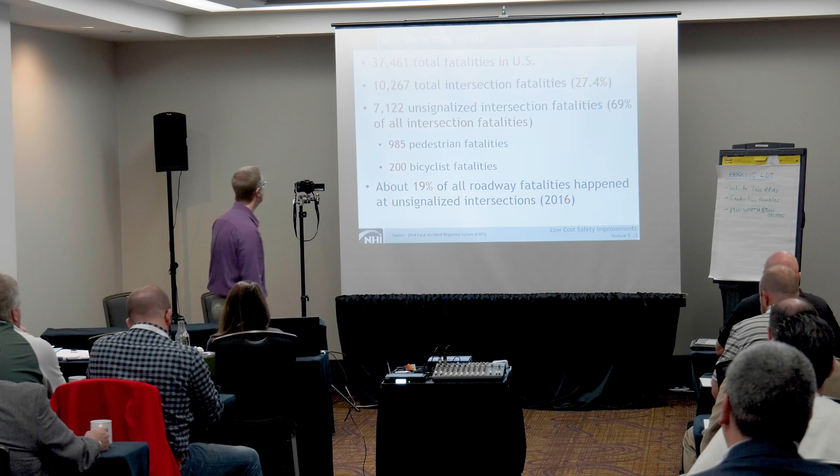So what's of importance here? 20% of roadway fatalities are at unsignalized intersections, nationally, 2016. We've got a good chunk of ped crashes, those keep going up, and bike crashes, and about 27% are at all intersections. So what does that mean? Not a lot of fatalities tend to happen.

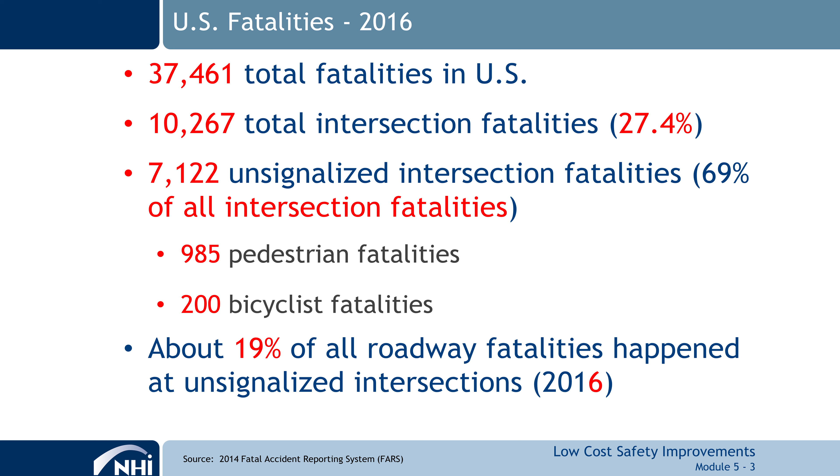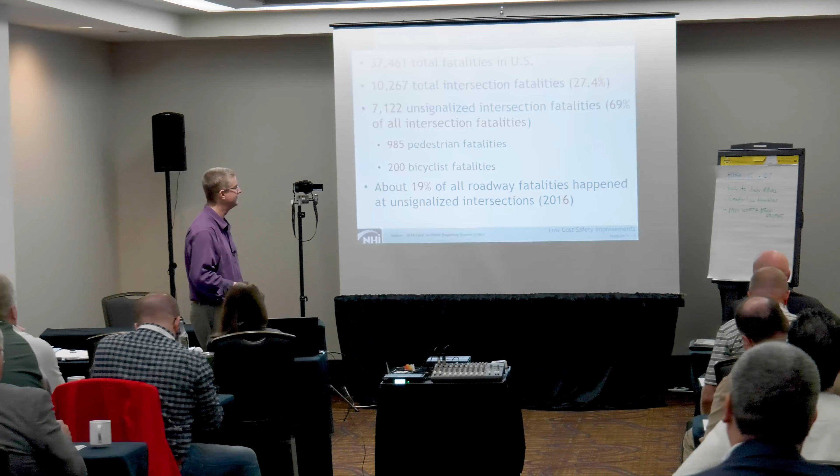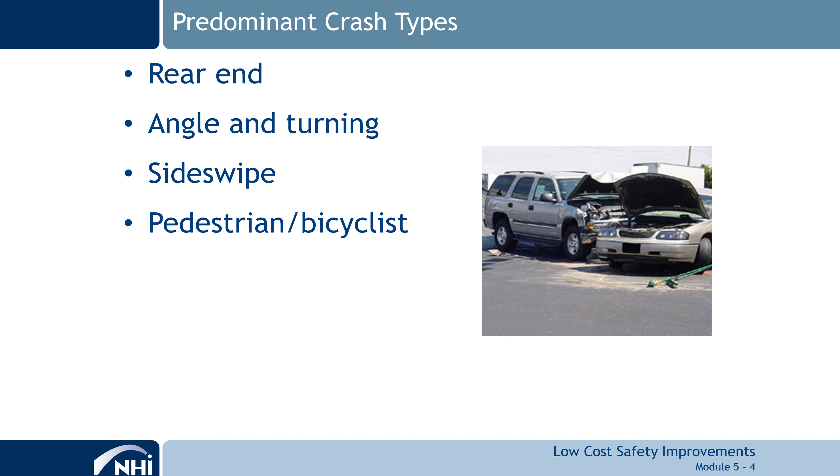So we have rear end, angle and turning, side swipe, and ped crashes. We mentioned in signalized intersections that your PDOs and your rear end collisions may go up, but your angle ones may go down. You need to recognize that sometimes we're making decisions based on the type of crash and the severity versus all crashes, because your crash rate will go up when you do a signalized intersection.

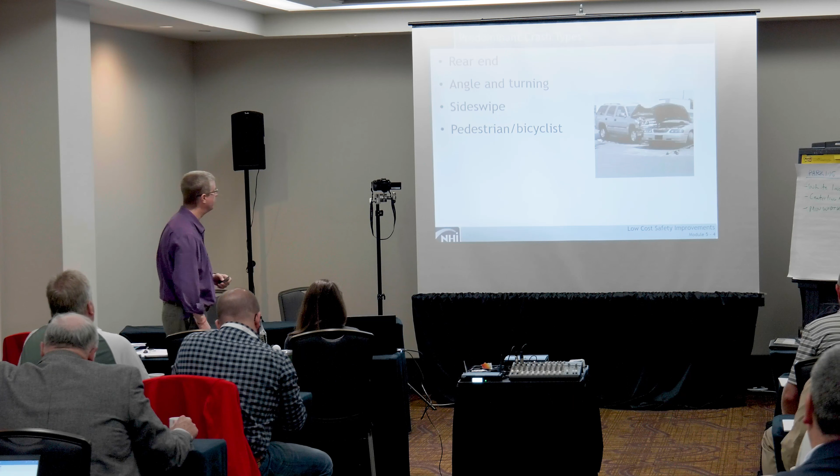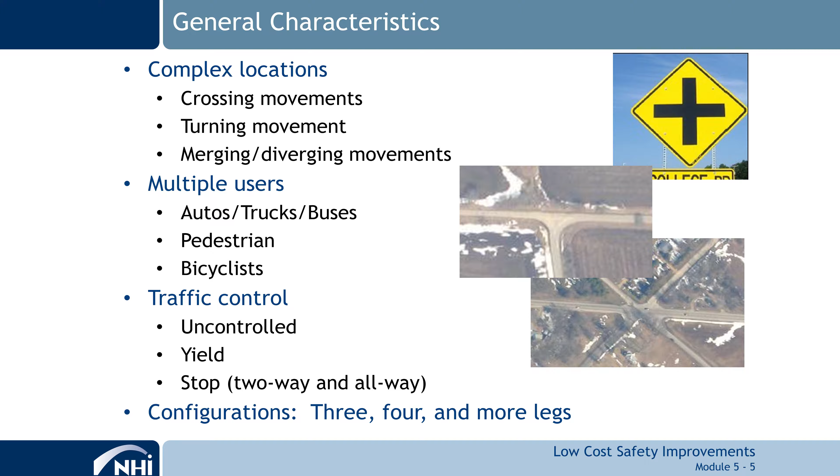Where's that lower one at? I have no idea. What would you do here for a safety improvement? A roundabout? Yeah, you already have enough asphalt. You certainly have a ton of asphalt. Yeah, you probably already have the right-of-way.

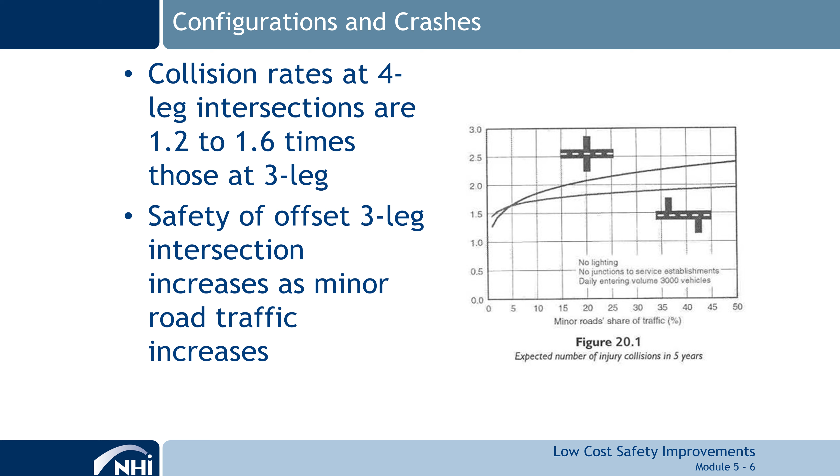There have been studies on converting from 4 to 3-legged intersections. We do know, again, more conflicts at 4-legged intersections, 1.2 to 1.6 times those at 3-legged. And the research has shown that safety at offset 3-legged intersections increases as minor road traffic increases. What this graph shows is basically crash rate with regard to minor road traffic share, this one for the 4-leg and this one for the offset 3-leg.

And it just shows that gap getting bigger as the percent gets higher. There is something in the Highway Safety Manual related to this kind of conversion, and that's this slide. There's a little bit of documentation out there online about converting 4-leg to 3-leg.

As the designer, I want to make sure that those things are far enough apart that they're not interacting, and that I don't have a lot of through volume on my minor road. There's percent of minor road traffic, and then there's through traffic on your minor road. So all this is saying we're taking the number of conflicts down, and now we're separating them. You can also bring them together.

What does this impact? What operationally does this impact when you do this kind of conversion? What does it increase, operationally? Delay. Delays. I mean, what I'm talking about is operations, so there's operations parts to this too—there's delays and things like that.

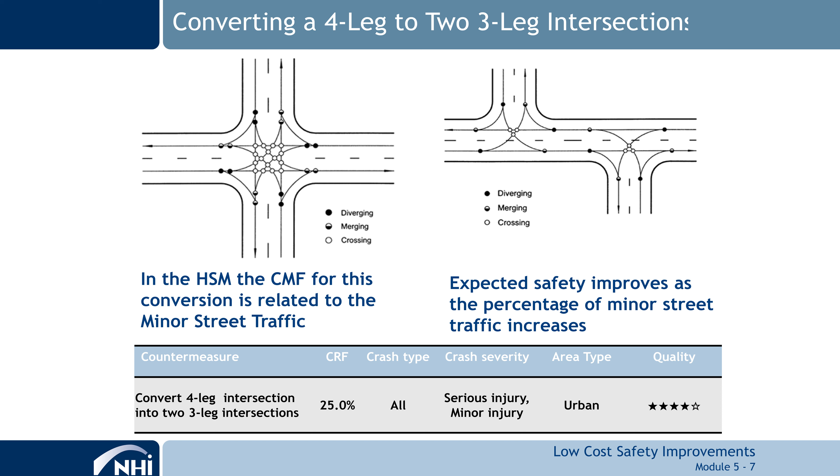And there's a difference between this design and if you were to flip those. It's about where you're turning left and where—turning left off the main road this way, you're turning right off the main road this way, you're turning left on the main. See what I'm saying? It's about where you're turning left on and off. And so all this matters.

So we're simplifying this in a lot of different ways, but there's a 25% reduction in all injuries in an urban area for specific situations. Sometimes this matters if designed properly and correctly.

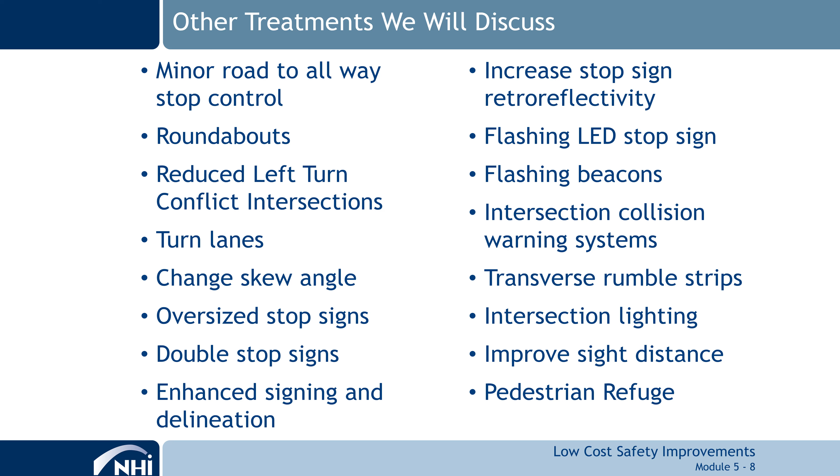Okay, lots of treatments we can discuss. Does anybody have anyone in particular they want to discuss? Because we've got time, I'll just kind of clip through them like we've been doing. The very last one?

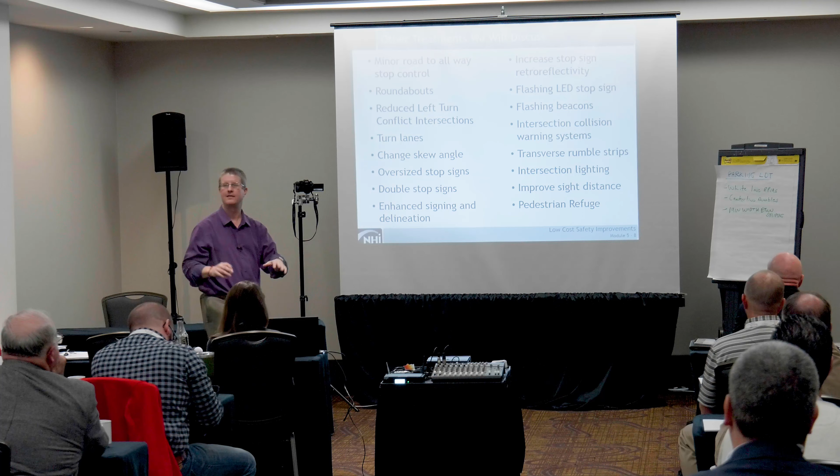The last slide—did you say that if you're going to convert it from a 4-way to 2 3-ways, you want to do it this way, you don't want to do it the opposite way? It just depends on what you want to do. You don't want the left turns over that. If you do the opposite way, yeah, you'll have that problem with the left turns.

Right, they got to be far enough away. Yeah, if 400 feet, at least, yeah, depending on the design and which way they go. Yeah, it's all related. Yeah, I understand what you're saying. I would think if you're moving it that far, that it'd be a pretty hefty, expensive project to move that far. Well, yeah, and we may or may not be talking about low cost here either.

When they did this study, it was my understanding that they didn't split it out between the two different designs, but just from an engineer's or operations design person's point of view, I know there's a difference between this and this, right? Yeah.

There's that four-way again, it's supposed to be all-way. This is in the highway safety manual, minor road to all-way, 75% reduction in angle crashes, 48% in all crashes. But again, specific situations, right? The MUTCD has warrants and things like that for this kind of thing.

It's not just everywhere. So it's reducing this kind of crash in moderate volumes and balanced volumes, and being selective, because delay and things like that change too. There's operational trade-offs for this kind of thing.

And then we have way too many unwarranted stop signs out there in this country, in my personal opinion, including somewhere where I was over Thanksgiving back at home in a very well-established neighborhood.

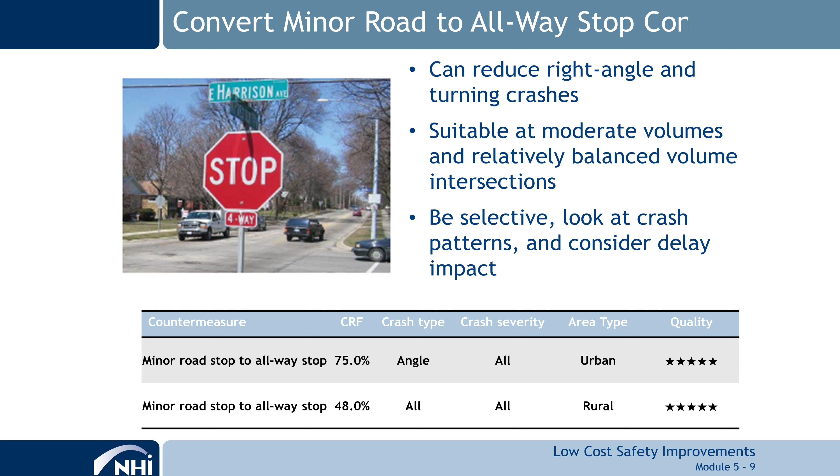So I think, yeah, 2009, the shall was you shall use all-way, that you shall not use two-way, three-way, four-way — it's actually a shall not, which is unusual in the MUTCD.

Those don't have to be replaced immediately, just after a useful life. Is that correct? It's all about that first chapter of the MUTCD and how you follow it. And in the first chapter, it talks about what you're talking about. Yeah, it's not like you got to go out and change everything.

But if you take it out and you don't have an all-way and you've got something else that still moves, then you have to add another sign that says traffic from the right doesn't stop or something like that. It's a yellow sign at this point. So, yeah, you'll have to read the MUTCD, or we could go do some training on it.

Big percentages in the highway safety manual for roundabouts, from stop control to a modern roundabout. And then this one's on a high speed situation, 87% reduction. Again, huge percentages, rural, urban, yeah.

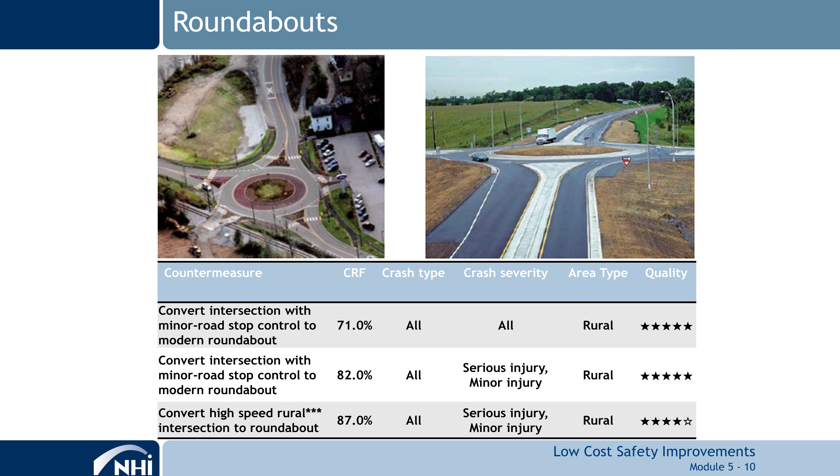Is there a volume limit to where you consider a signal instead of a roundabout, like a limit on traffic?

So I haven't done any kind of training in roundabouts for some time. You can get pretty high volumes through a roundabout, particularly if you're going multi-lane. I've got three right near my house that, not multi-lane, but lots and lots of traffic flowing through those.

The only place I've ever seen a signalized roundabout, and I know what you're saying, but at some point out in Germany, the volumes got so high on their roundabouts that they started signalizing them.

And it's really quite a dance when you try to signalize something that goes in a circle. It's really quite incredible.

The J-turn, I call it the J-turn. I know it's also called the RCUT now — the R-turn, R-cut, U-cut, restricted crossing U-turn.

Mr. Joe Hummer used to call it the Super Street intersection. He was out of North Carolina, I don't know where he is now. This is where you get rid of left turns on essentially a divided roadway expressway. These aren't in the highway safety manual, so we added those stars on the left, but you're getting into 34%, 53% reductions in rural areas.

I've proposed one of these on a road safety audit on an expressway in Wisconsin. People had died, they put it up, everything's fine now. It's all about doing it in the proper design, using Green Book focus, putting it in the right places. You're getting rid of the left turns and the throughs, and it has an impact on safety.

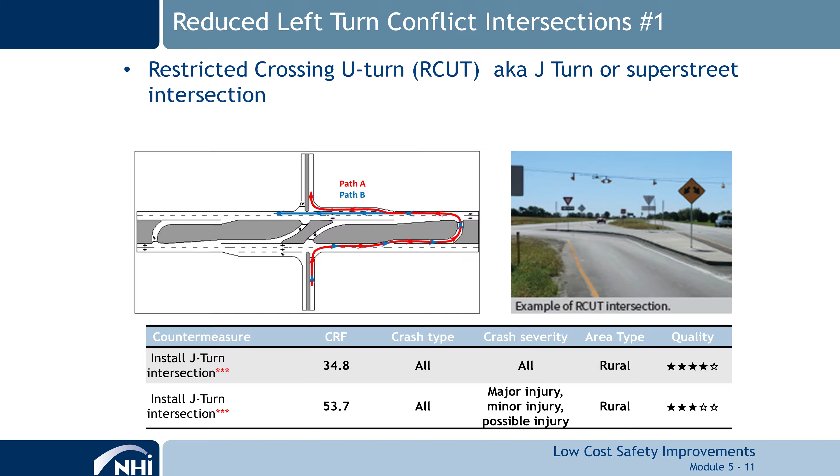There is some guidance. The Green Book's starting to talk about it now, and they talk about the loons out here where you have a little bubble, right? They're literally crossing that and then accelerating on the roadside. So it's all about how much area you've got, how much right of way you've got, and what you can do, then making that engineering decision. You've gotta build that out.

If you get into plowing areas and everything else, do you have any comments on it? You've got those in Minnesota, the J-turns. They tend to work well if they're designed well and in the right location. But yeah, logging trucks, agricultural equipment, just regular motor vehicles, large commercial trucks. This is on high speed, by the way, these percentages.

And then you have the Michigan, what I call the Michigan U-turn. I lived outside of Detroit for a long time, went through lots and lots of these intersections. It is different though, remember, they're still allowing the through movement here. But if you want to turn left, you're doing this kind of thing. So you're getting rid of some of the conflict in the main area. They did a synthesis and found a 30% reduction in injury-related crashes.

What I did want to mention is in the highway safety manual, let me make sure I got this right. In the CMF clearinghouse, you can find J-turn. You're not going to find M-turn or Michigan U-turn as far as I can tell. But there are 7 CMFs in the highway safety manual for moving left turns away from the minor approach to a U-turn, and it's all about whether that applies to the situation you're doing.

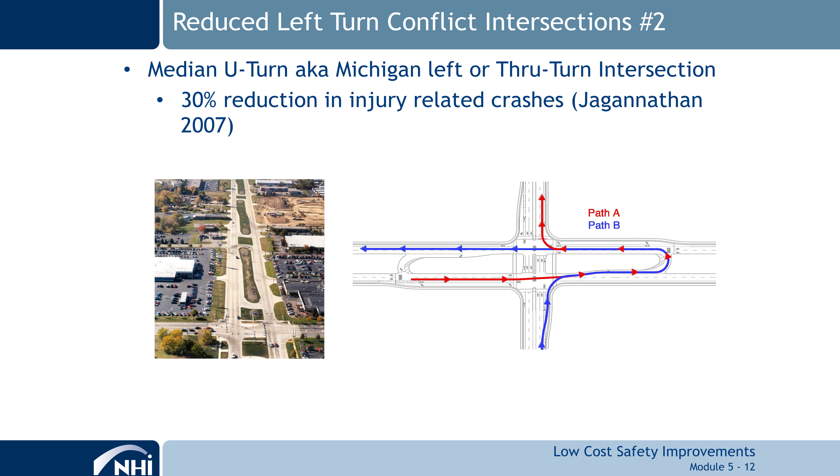Moving left turns away from the minor road - this doesn't move the left turns away from the minor road, it basically makes you do this. There's all kinds of different options in this kind of situation. You're basically just crossing here, and everything else goes around at these U-turns. Those are big, wide U-turn areas in Michigan, where sometimes people stack up next to each other, which is a little hairy and scary when you're going through there. But they tend to work. Oh, there's a picture of it right there.

I would note, we did one in Indiana, the first one. Like the Michigan U-turn or the J-turn? It was an R-cut. 3 years ago, we had multiple fatal and high injury crashes prior to that. In the 3 years after, we've only had 2 minor crashes. In addition, in the area traffic volume has grown about 2.5%, but at that intersection we recorded a 14% increase in traffic volume, and a lot of it is trucks - commercial vehicles are preferring to turn left at that location versus other locations.

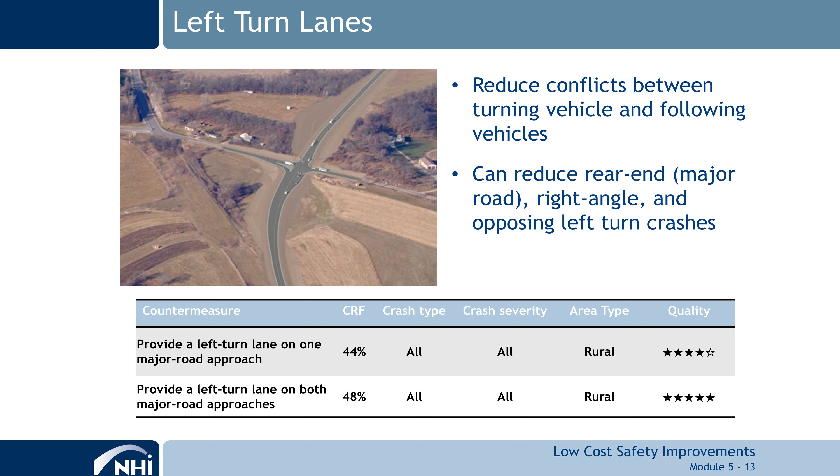So, high-speed situations. Left turn lanes in the highway safety manual show big percent reductions if you add left turn lanes. There's reasons we add turn lanes that aren't just operational. This is out of a Harwood study that made it into the highway safety manual. Same thing with right turn lanes - 14% on one approach, 26% on two. Certainly can improve operations in some cases.

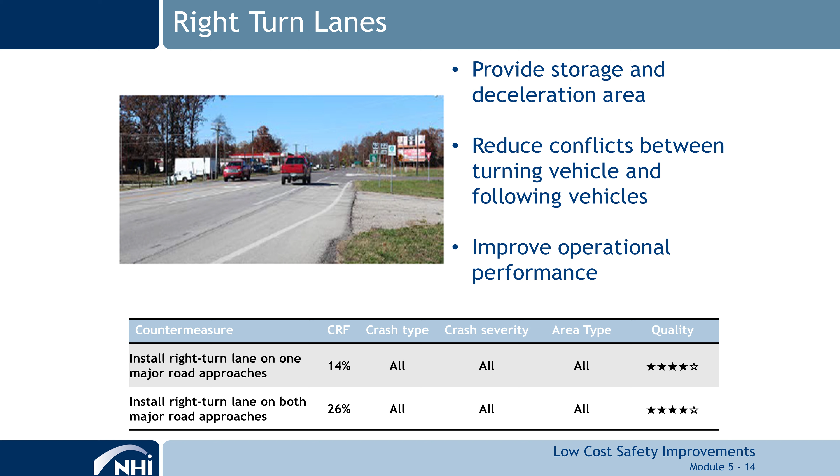I'm going through this pretty quickly, so if anybody wants me to stop, say stop, because I do want to get to the case study.

Anybody doing offset left turns? Yeah, lots of this happens at signalized intersections, not so much unsignalized.

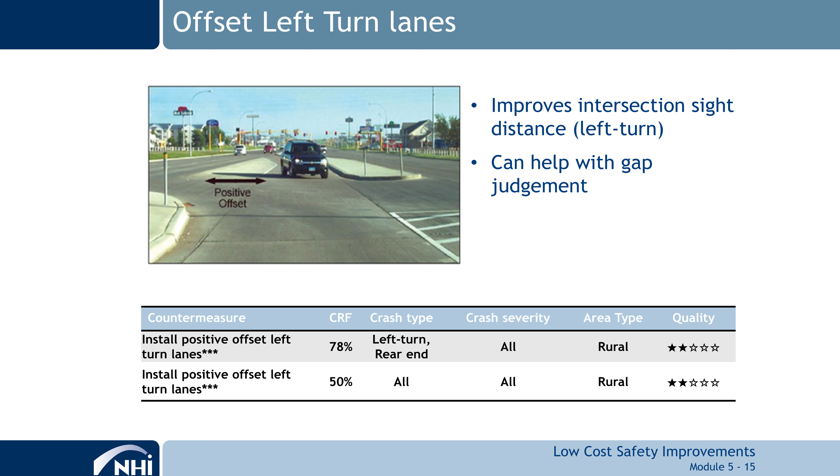This was actually the one where I was reading the CMF and got all excited because I thought we had some new information. Then I read the abstract, and at the very bottom it said don't use it for unsignalized. So this is not in the Highway Safety Manual, but you can see the 78% reduction in left turn crashes and 50%, but just a 2-star rating, because I think this study was Maze's study, which was a high-speed divided situation. You need to recognize that it's not quite applicable. That's why I got excited about that other information, I thought it was on unsignalized and maybe not on high speed.

Same thing with offset right turn lanes. Anybody doing these? Yeah, in certain places, right? It's important to have, because if people are lining up to turn right, you push them back and improve sight distance, and you get a 69% reduction in angle crashes. Again, high speed divided situations for that data.

Wouldn't that make it more difficult for the vehicle pulling out? I mean, it looks like you've got good sight distance there, but wouldn't it be more difficult for the minor street vehicles to judge gaps when they've got people coming at them, and it's so much wider they have to cross?

And if there's a left turn lane, they're trying to judge that too. Right, it does increase the width of the intersection. It may impact their choices.

Yeah, more sight distance because the stop bar is not as far back. And because the vehicle making the right turn has to commit to that lane, if they're not using a turn signal, the driver now has a visual cue that they are committed to making the right turn.

Right, go ahead. So where is the stop bar for the minor street there? Is it prior to the right turn? This might not be the most proper design or the proper angle of the photograph, but typically you want them to be able to see here. You're trying to improve the sight distance of the people here.

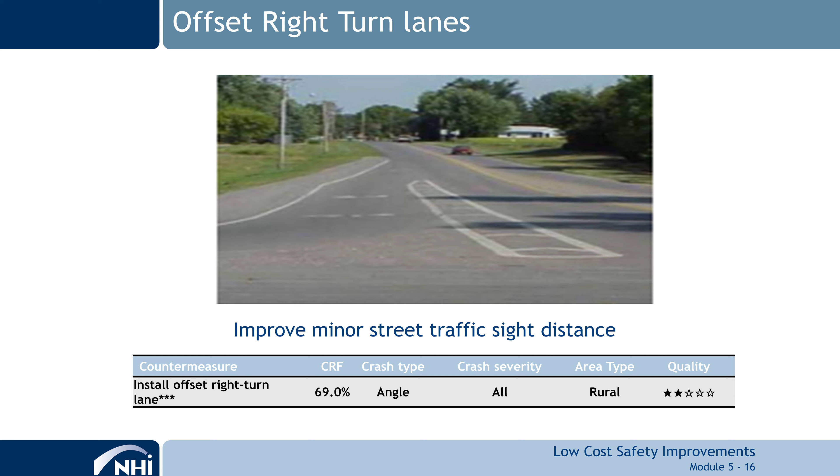Because you're pushing all those right turning vehicles behind them. Yeah? Right, yeah, it's not probably there. So it's somewhere in here, and I don't know what's behind the camera at this point.

You also get some conflicts, like a right turner coming here, if there's another vehicle going into the page turning left, then they're thinking, do I have to yield to this right turner? Does he have to yield to me?

It's all about where your yield signs are and right-of-way rules. And again, all I can say is the ones I've seen are not as complicated as we're making it.

But pedestrians have to cross a longer distance. There are certainly trade-offs here.

Goes right into a roundabout. Yeah, it may, it might, again it just depends. It's hard to tell what we're really looking at here.

Angle is important. We used to do a lot of this. We'd like to tighten them up a bit, both for pedestrian reasons and visibility. There has been a study, and by the way, what's up here is just an example.

Then there's the study, they did a very specific study in Peoria, Illinois, on improving the angle and found these 60 and 40% reductions of all severities. This was for right turn crashes. The study basically looked at anything that helped with that angle.

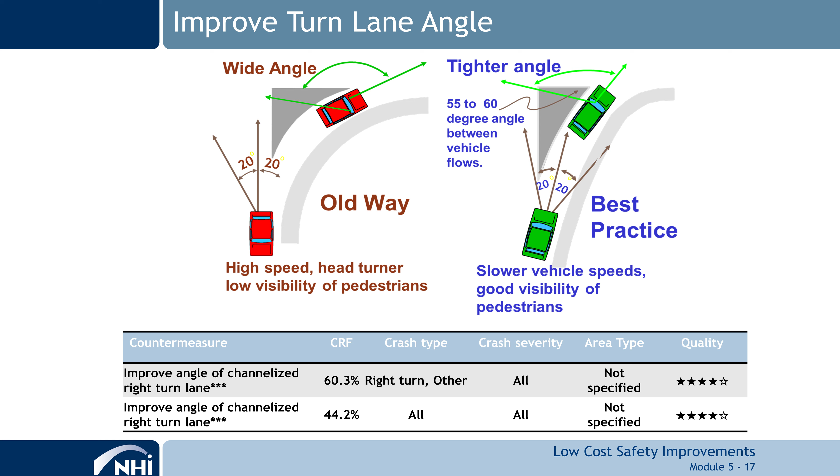So this is just an example. They did anything they had to do to help with that angle, to reduce head turn, and they were also trying to serve trucks better, but it also has an operational impact too. Remember that. It might be safer, and it's also helpful for pedestrians.

We're actually currently revising our design manual to address this as a best practice element, and there's not a lot of detailed design information out there. Right, you're just kind of tightening it up.

Because, yeah, I know when I'm a pedestrian a lot in high-speed situations out in Iowa, if I'm at that intersection and I can make eye contact with that person, I know whether they're going to continue through that yield sign or whatever it is.

So good stuff. Skew, you've got an equation.

I wanted to mention this. You might want to cross this out, because I actually contacted the CMF Clearinghouse people. There is an equation for this, and the one in the CMF Clearinghouse wasn't quite the same as the one that was in the Highway Safety Manual.

This is the one that's in the Clearinghouse, and I went back and looked at the Highway Safety Manual, and it was a bit different.

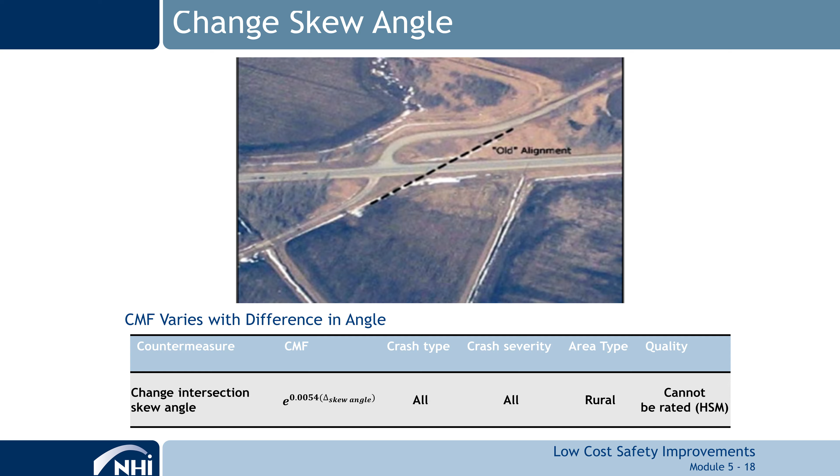They had in parentheses here, for the CMF now, not a CRF because it's an equation. Basically the difference was between a 90-degree angle and what you had, which is different than a difference between proposed and existing. So there were some assumptions being made. I've contacted the CMF clearinghouse people a lot saying, hey, I saw this, I'm not sure it's quite right. So they've added a note to the CMF clearinghouse as of yesterday on this CMF CRF. Now it's an equation, so they can't rank it. And basically it comes down to about a 5% reduction for a difference of 10 degrees, something like that, if I'm recalling correctly. Let me check.

5% reduction for every 10-degree reduction in skew angle is what that equation represents.

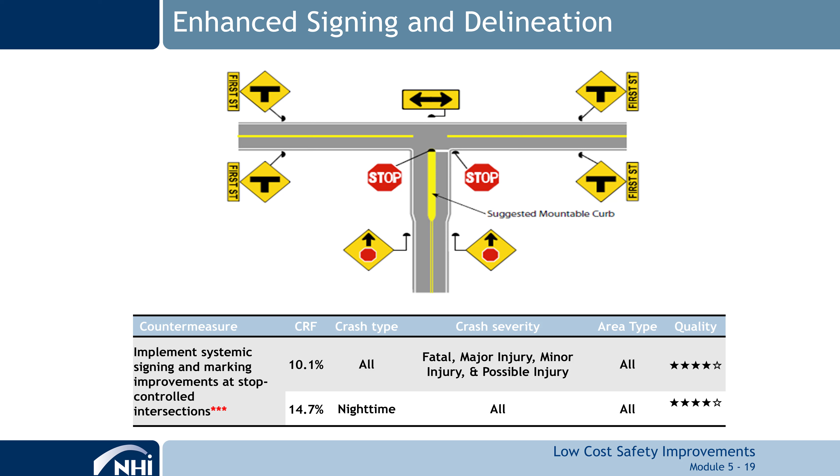Basic set of signing on an intersection. There's the picture that comes out of the intersection low-cost safety improvements at intersections document by Federal Highway, where they said to do this will get you, I believe it's a 40% reduction in crashes. That was a bunch of experts getting together and talking about it. Yeah, 40% reduction. What's in the CMF clearinghouse for implementing systemic signing and marking is a 10% reduction in injuries and a 14% reduction in nighttime, but the basic set is not quite the same. And remember when I made the point of when you start getting into these combinations, you got to pick the one that looks closest to you. Now, the document that was from is from 2009, and the research comes from 2017, and it's a 4-star. So we got to pick one, right, with regard to the basic set of intersection safety improvements. I think the signs that got dropped out from the study here are these two, and then maybe one of these street name signs, and for sure that double arrow.

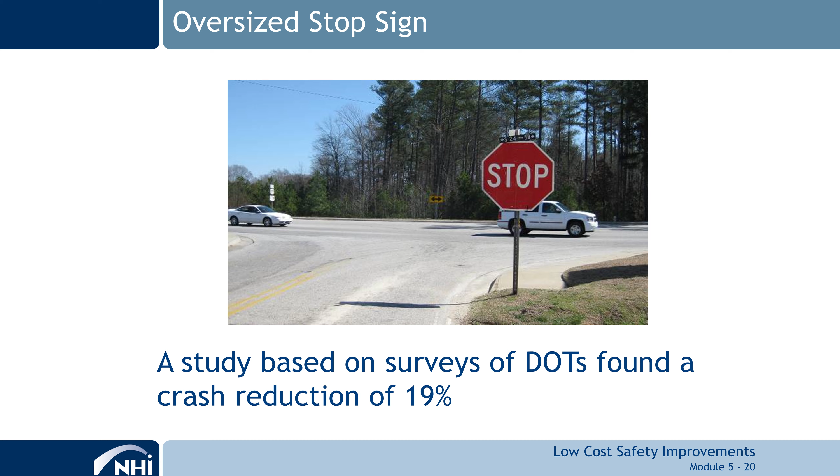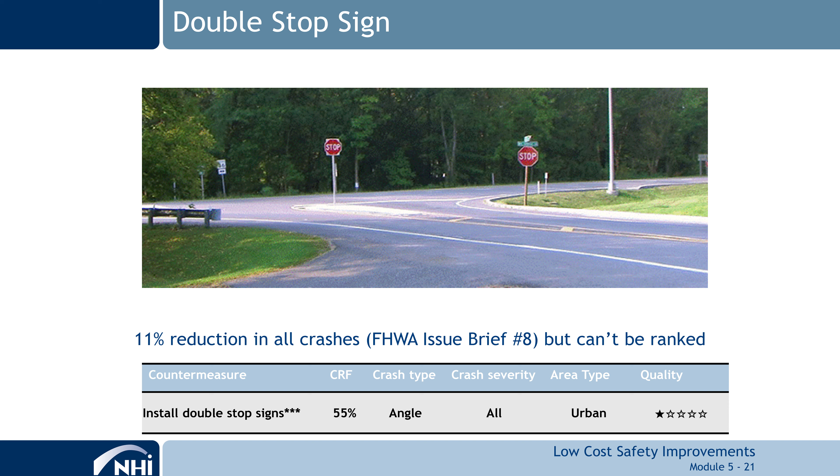Big signs, big stop signs, 48. Survey study shows 19% reduction in crashes for that. Doubling up stop signs, 55% reduction in angles, all urban. That's a 1-star though, okay? That's a 1-star study. So it's all about what we've got. This is the best I've got for you. 11% reduction in all crashes, but wasn't ranked because it was based on a survey.

Do you have one for rural? No, not as far as I know. I can check it out for you. Rural two stop signs? Yeah. Well, because one of our major thoroughfares, we went from a single 30-inch stop sign to a 48-inch stop sign to double 48s to RRFBs. And now RRFBs with intersection lighting, so I'll check.

Retroreflectivity matters. It's a requirement of the Manual on Uniform Traffic Control Devices. You've got to do it. There's certain minimum requirements. Plans were supposed to be in place at all levels of government to replace signs that are below a certain amount, years ago at this point. So 7.6% reduction in angle, 17.5% reduction in rear end, 4 stars, but not in the CMF clearinghouse again because it's operational.

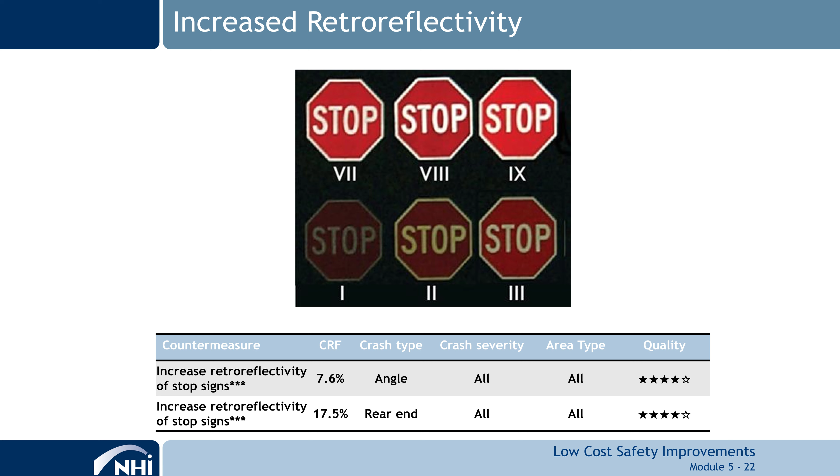Is there a minimum here that you have to put out there? Right, so in the Manual on Uniform Traffic Control Devices, there's a table on the minimum retroreflectivity you have to have on signs. For certain colors, it changes and things like that. So, and you're not supposed to go below that, yeah. But is that varied by facility or? It's been so long since I've taught that. So you can't say it's got to be 7 or above. It just depends on your situation, right, what you're saying, right? Any input on that, Rich? Sheeting wise? I think it's all, and it's not engineering grade. I don't know what the numbers mean.

But all I know is gone to the diamond grade, right? Stop signs, yield signs, high intensity on anything else. And I thought I'd recalled that engineering grade was not working anymore, it's got to be something above that. So yeah, we don't allow engineering grade. We're currently, I don't think it meets any of the requirements. Type 8, but we're thinking about raising that up and going to Type 11. We're looking at that now. Yeah, and I know there's a Federal Highway website on all that too, on the types and things like that. And I don't know, again, I couldn't tell you the specifics about the study with regard to what number it looked at.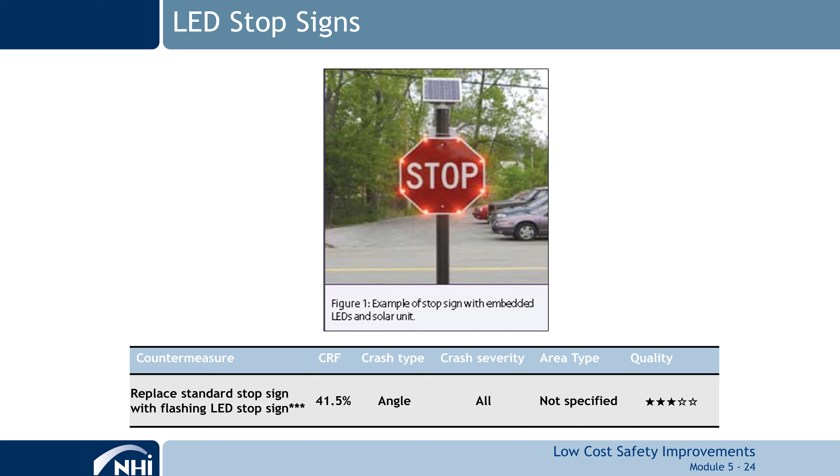There's your LED, a 41% reduction. I think that's a 2014 study, out of Minnesota actually, replacing a standard sign with the flashing LED stop sign, 3-star. That may or may not make it into the new highway safety manual.

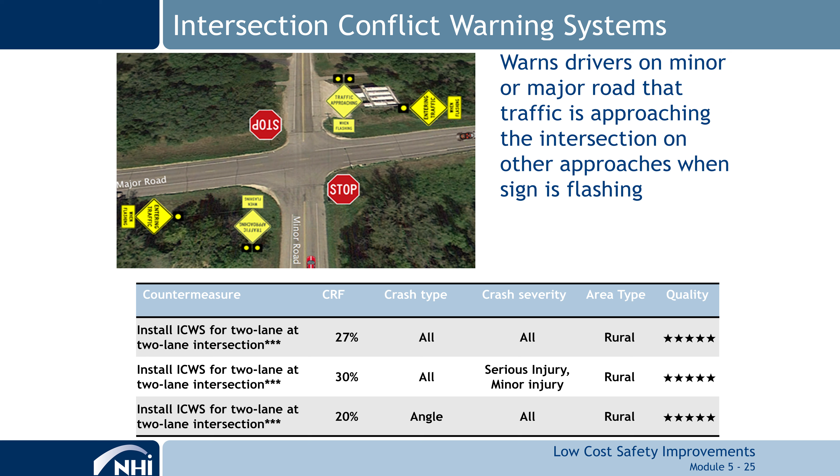The warning, the conflict warning systems—everybody knows what I'm talking about. You tell people whether there's somebody on the other approaches that are conflicting with you and whether you should pull out. Lots of different versions of that. Big reductions in angle crashes in rural areas, 5-star studies, telling you to go or not go.

And if you're going to do it, do it in very specific locations, not everywhere, because then people get used to it. Plus there's a noise issue. My recollection is it's not, again, it depends on the design. If it's properly designed, I don't think it's a big issue.

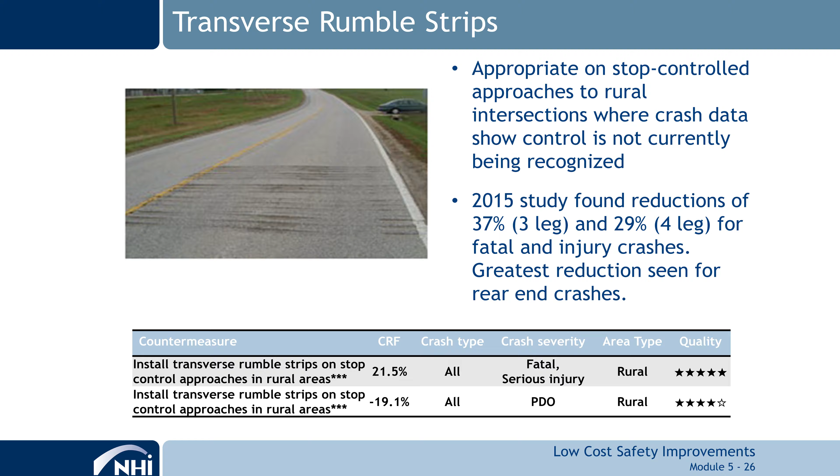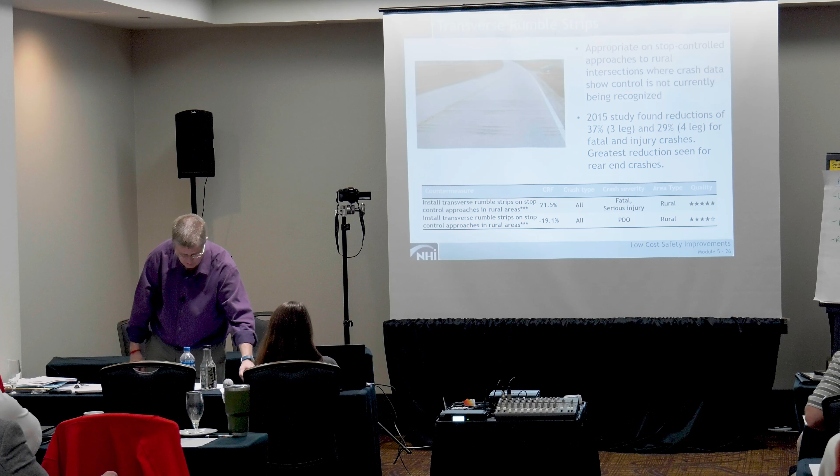Noise pollution—so additionally, one must consider maintenance required, and the effect on bicyclists. We forgot about the bicyclists or motorcyclists. Some states use these only within the wheel path to let them go through the middle, right? So, yeah, could be. We don't use a lot of them in Iowa.

I think we were using them too much, so we backed off. What I've done, or what my predecessor did, is install transverse rumble strips in a set of 3 and then a set of 2 coming to the stop sign. We'll skew them a little bit toward the center line, so if people are going to avoid them, they avoid them on the shoulder side of the rumble instead of the center. Shifting them towards the center line so people can go around them.

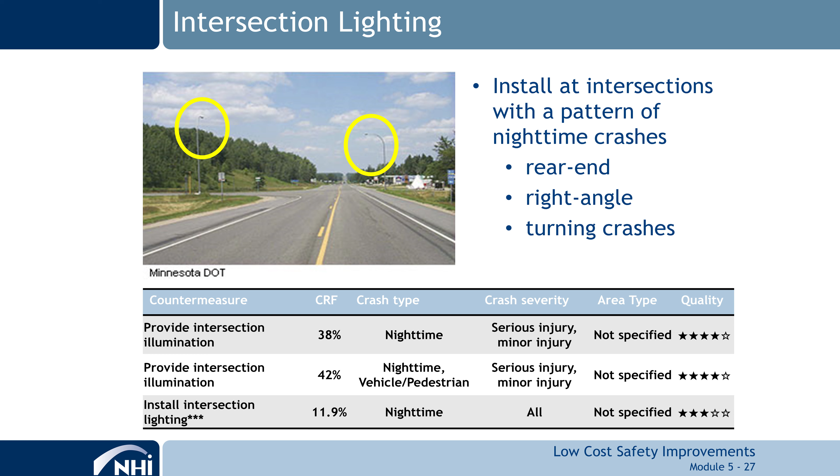I do have something on lighting. Again, I just put it out there that nighttime impacts are bigger for pedestrians and whatnot. They did a study in Minnesota, not on this table, about just doing the one light, and that also found reductions in crashes.

New Georgia Tech study, good, thanks. I wanted to bring up intersection sight distance.

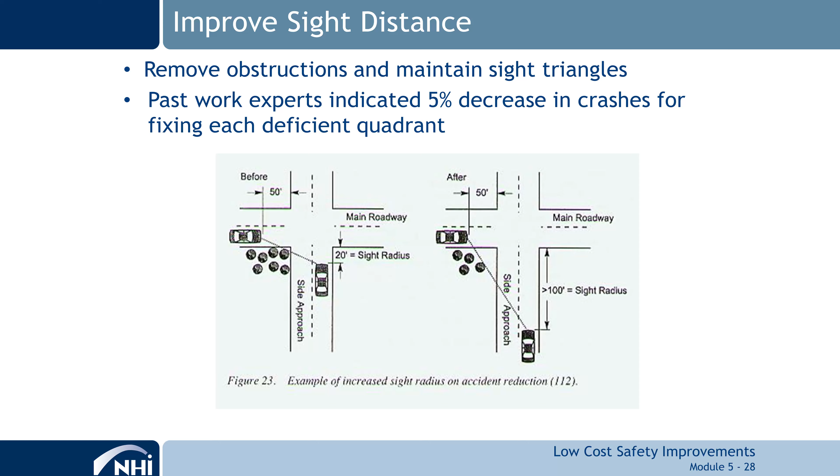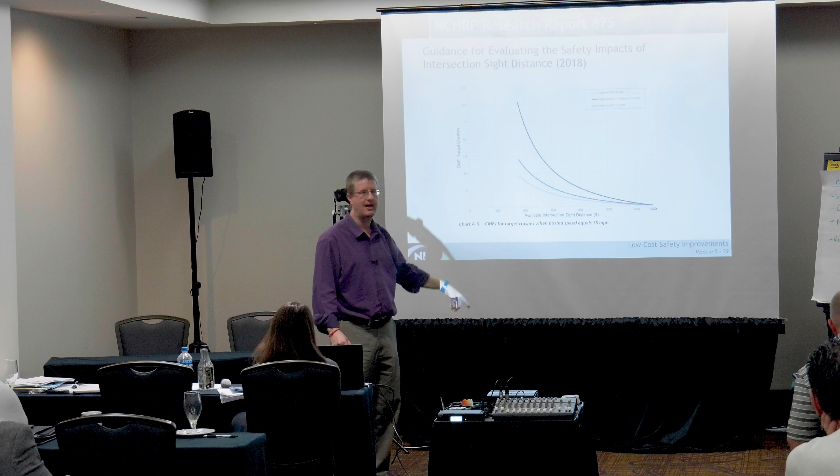This is brand new. This used to be, 5% per quadrant if you made it, so there was good safety improvement, right? This is what's out there now—get NCHRP 875, it's brand new from 2018. I didn't include the equation of these graphs because it's about this wide, this tall, and that wide. It's stacked, but everybody could apply it. It's just too much, so they put it in graphic form.

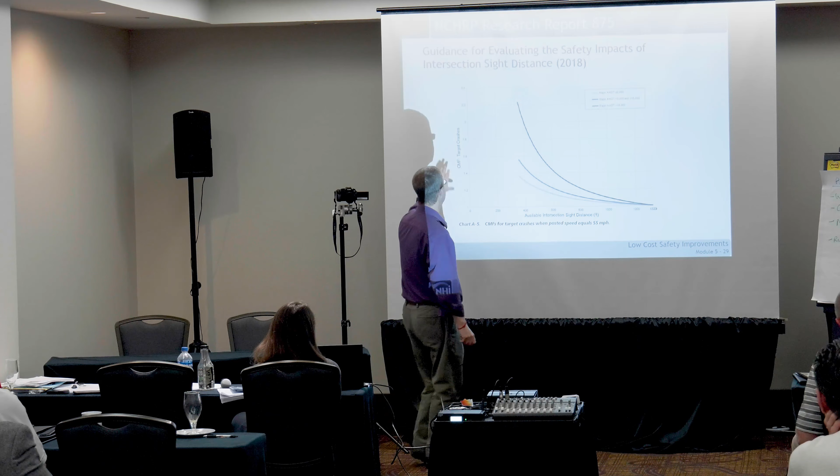What you end up doing with the CMF here—total target crashes, available intersection sight distance—is go to the right graphic. I literally added this Friday, I think it was. Each of these curves is based on ADT. You pick the right curve, you go in with your existing sight distance and your proposed sight distance, and you divide one by the other.

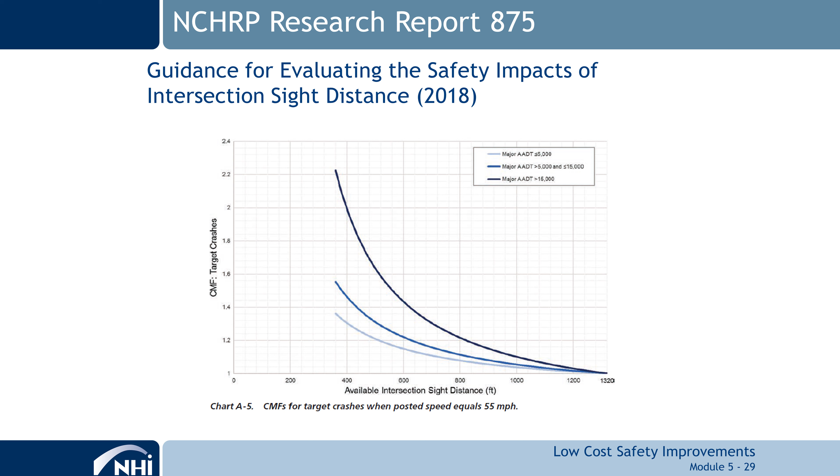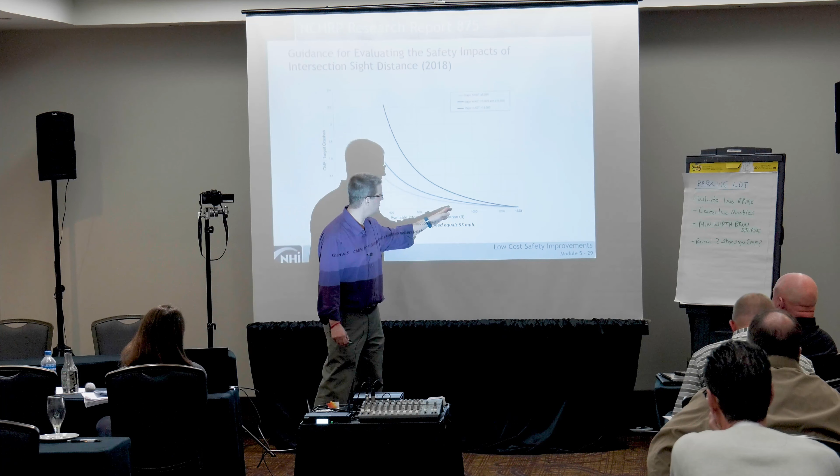So existing sight distance should be lower, which means your CMF is higher, and you're going to increase it, which means it's going to go lower. So you're dividing your proposed by your existing to get a CMF that's below 1, unless you're trying to decrease your intersection sight distance, which wouldn't make any sense to me.

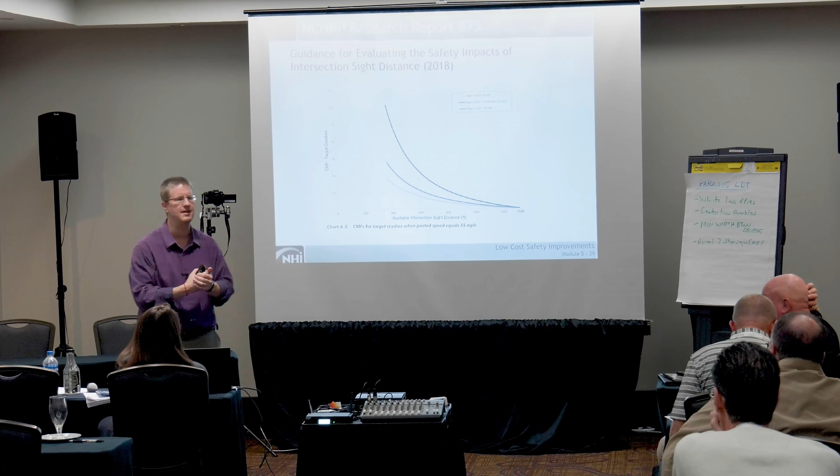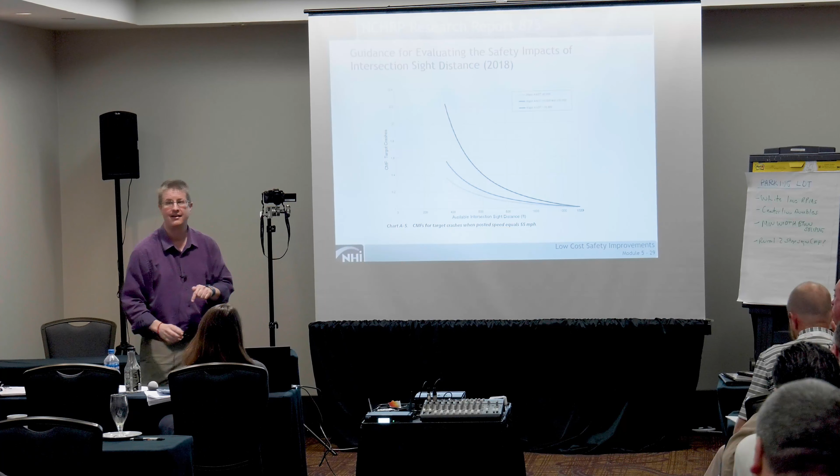So they acknowledge that no one's going to apply that equation. It is in the CMF clearinghouse, and you can take a look at it. But it came out this year, and we've been waiting for this study for 5 years. It's a 46-page report, easy to read, with great application-oriented guidance in it.

So maybe that's the way NCHRP is going now, because it's really a wonderful study. And I've been waiting, believe it or not—I wait for stuff like this with bated breath, just hoping it comes out. So, 5 years of waiting.

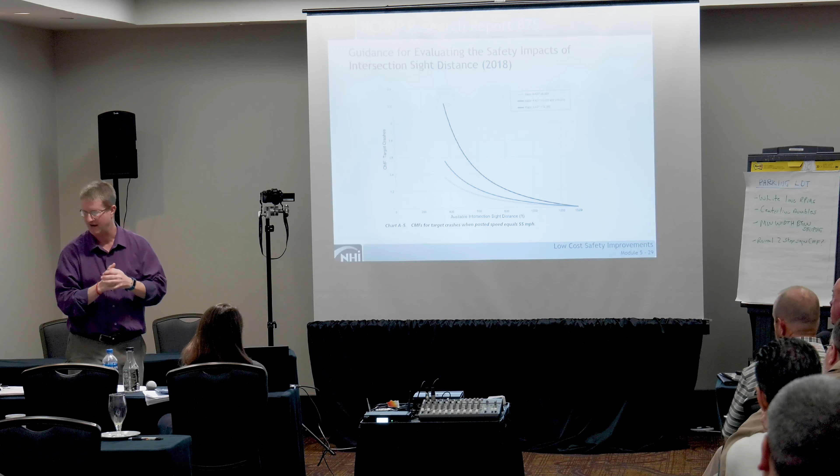So any questions on any of this stuff?

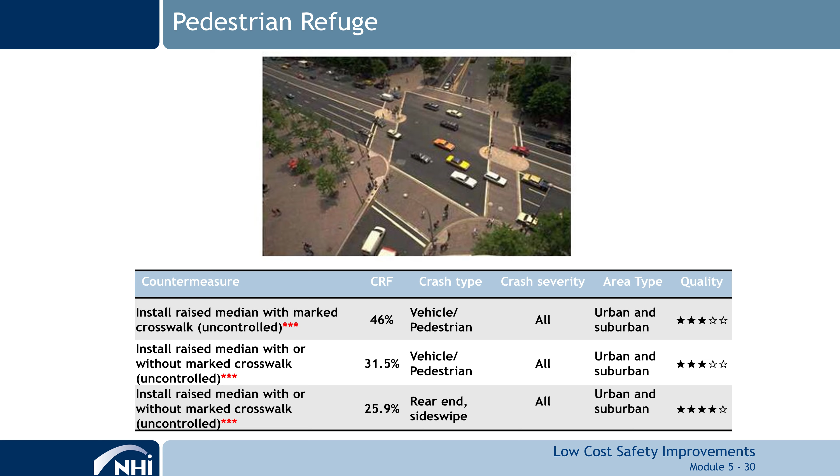Here's your pedestrian refuge—we added 3 stars there. Again, big reductions in vehicle-pedestrian crashes at marked, unmarked, uncontrolled situations.

And we want to do a module, okay? We want to do the last module. We can either do it together and get to lunch—when's lunch, noon? This has been a long morning. Let's just talk about some of the stuff in the module.